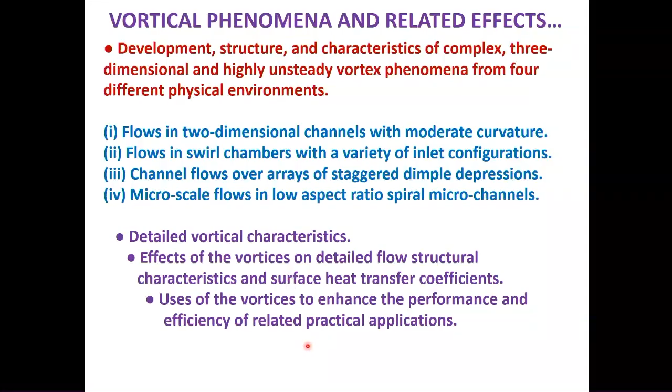We look at detailed vortical and vortex characteristics. We look at the effects of the vortices on detailed flow structure and especially on surface heat transfer characteristics. I do a lot of work related to convective heat transfer and thermal management, so we're very interested in the effects of these vortices on the thermal management. We also use these vortices to enhance performance and efficiency of a variety of devices for a variety of practical applications. First of all, curved channel flows.

We're talking about a very simple 2-dimensional curved channel, and it's astonishing the variety of phenomena that are present in these different channels. From laminar 2-dimensional flows, we then develop Dean vortex flows with arrays of counter-rotating vortex pairs. The Dean vortex flows, of course, develop because of centrifugal instabilities. We then go to wavy Dean vortex flows. These were discovered by a gentleman named Warren Finlay from the University of Alberta in Canada. The modes that we have also investigated include undulating wavy Dean vortex flow and twisting Dean vortex flow.

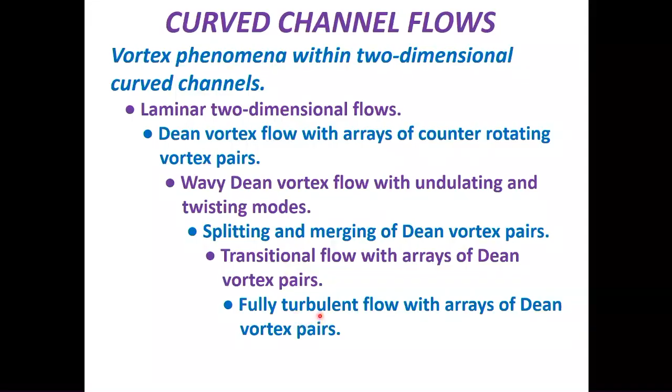We then found very interesting span-wise wave number selection phenomena related to splitting and merging of vortex pairs, and I'll talk about that in some depth. We then go to transitional flows with arrays of Dean vortex pairs, finally fully turbulent flows. So realize in a simple 2-dimensional curved channel, a diversity of different phenomena are present. This is the configuration that we looked at.

Again, a typical experimental facility with highly controlled flow, but the important part here is a straight part of the channel followed by the curved part. So we get very well-developed flow in a straight 2-dimensional channel. We then get effects of the curvature afterwards. The aspect ratio of this channel is 40. The height is 1.27 centimeters. The ratio of shear layer thickness to curvature is 0.011, which can be considered moderate or mild curvature.

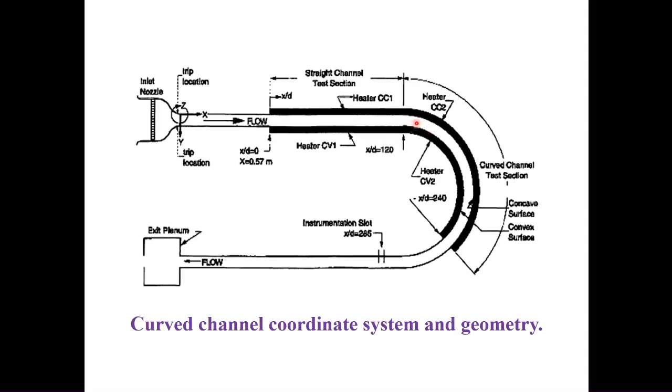We also have heat transfer. We make measurements of heat transfer with these heated surfaces that are shown by the black lines. So again, initial development, straight channel flow, then the curved channel flow. We then exit out here. And this is where we make measurements of surface heat transfer, flow structural characteristics, using hot wire anemometry. We get spectral variations of flow variations as well. This is the kind of phenomena that we look at.

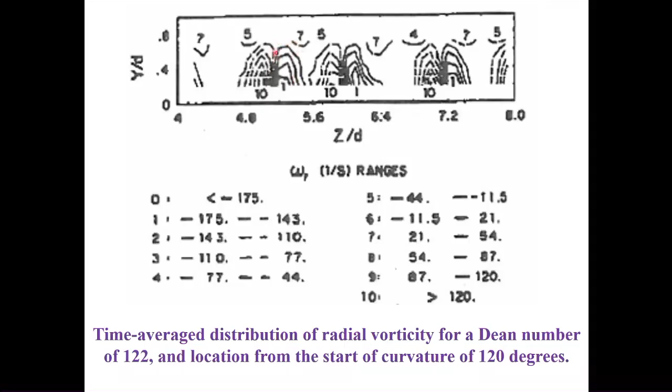And what I want you to see here, this is radial vorticity distributions. Very well-defined vorticity distributions, negative, positive, negative, positive, negative, positive. This corresponds to the time-averaged locations of the unsteady vortex pairs and the time-averaged locations of the smoke patterns. And again, in this arrangement, the upwash region would be between these two opposite sign vorticity regions, the downwash region here. So the vortices, the pair with an upwash between and then downwash around it.

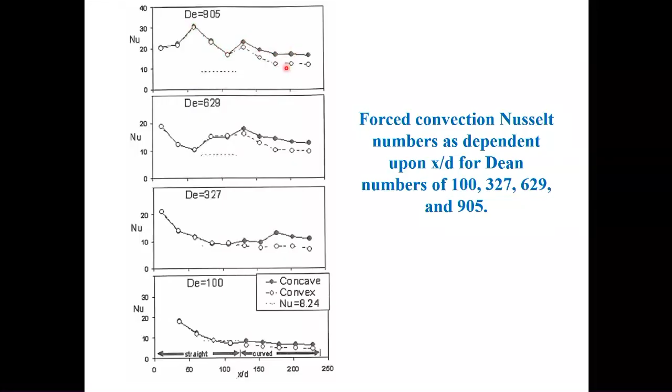We then see this as more pronounced as we go up. This is due to some undulating phenomena. We then go up here and then we deviate. We're now getting into transitional and turbulent phenomena in the straight part of the channel. Very much a transition here, then a decrease and so forth. So many different phenomena are occurring in this one. And again, we always see higher Nusselt numbers on the concave surface than on the convex surface for this curved channel flow. We then also looked at swirl chambers.

Swirl chambers are a cylinder, and we have a diverse variety of unsteady phenomena with an incredible range of length scale. Large length scales, tiny length scales even on the verge of viscous dissipation. These flows are highly turbulent, but also length scales related to the development of arrays of Gortler vortices.

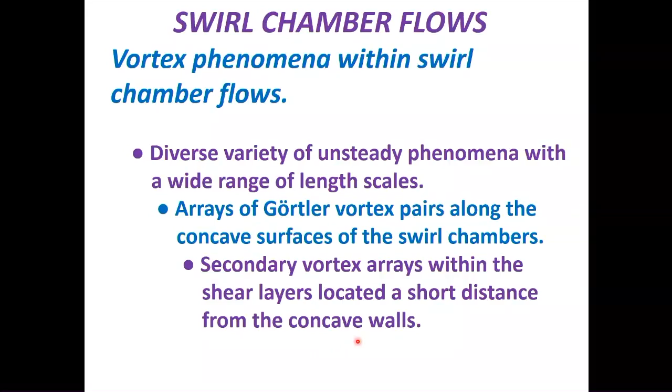So we've looked at Dean vortices, we've looked at Gortler vortices, and again, we see the Gortler vortices developing after the inlet along the concave surface. And of course, Gortler vortices also develop due to the presence of centrifugal instabilities. Secondary vortex arrays also develop in the shear layers, so there are primary Gortler vortices and other secondary vortices. So an incredible variety.

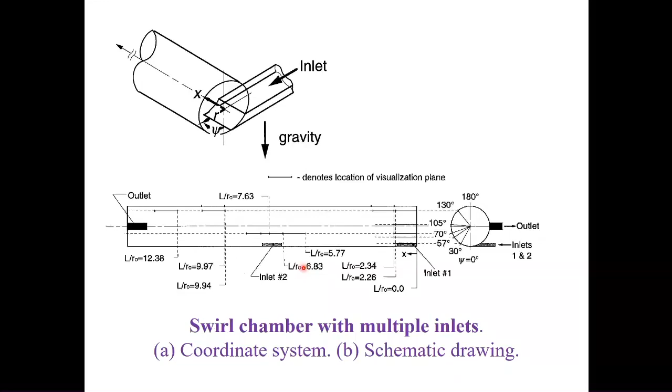This kind of shows you the extent of one of the swirl chambers we've tested. And again, there's the inlet, tangential to the circumference coming in, and then the flow swirls around. We have an outlet way down here. In this case, we have two inlets. The second inlet then revitalizes the flow, reestablishes flow coming in with a new array of Gortler vortices. So again, the inlet comes in, concave surface, then an array of Gortler vortices form. The Gortler vortices can be incredibly unsteady and complex.

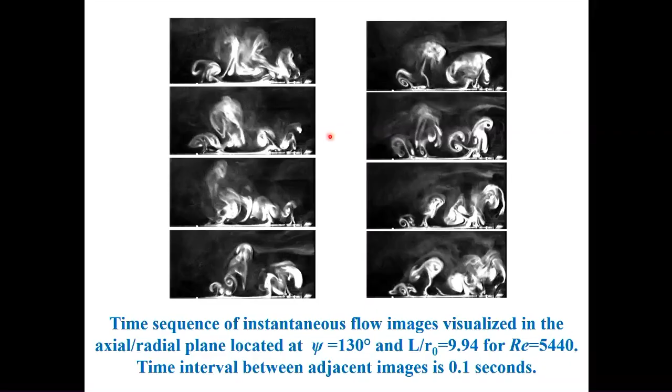This is a time sequence at a certain location for Reynolds number of 5440. Coming over here, you see the vortices will then form. You'll see them highly three-dimensional and distorted and very, very complicated variations in time. And again, the time interval between these different sequences, 0.1 seconds. Sometimes, for certain conditions, the Gortler vortices are well established, and they're in an approximately stationary form relative to the time average. This is a condition we have highly unsteady Gortler vortices. This is just downstream of the inlet.

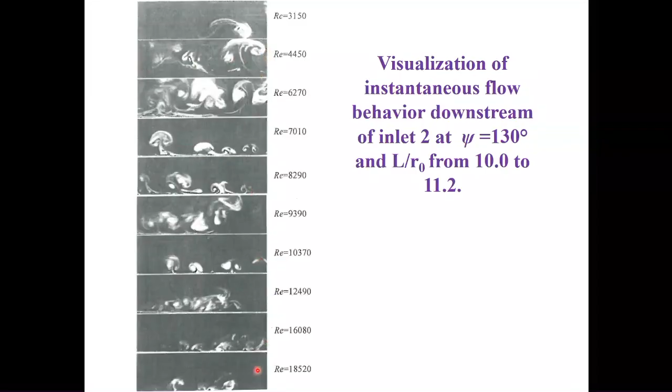We then see variations as we change the Reynolds number. Again, this is a cross-sectional plane just downstream of the second inlet at a certain streamwise location. And again, here we see Gortler vortices across here, but very distorted as we look at different span locations. Smaller ones, larger ones, incredibly large ones for the lower Reynolds number. Notice they become less pronounced and less large. They're smaller as the Reynolds number increases. So incredibly complex behavior in the swirl chamber due to the presence of Gortler vortices.

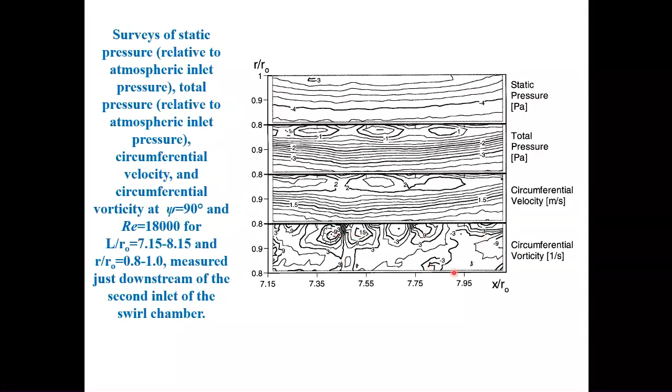We then also do time average work. The part I want to focus your attention is down here. Circumferential vorticity, negative, positive, negative, positive. So even though we have these Gortler vortices that are unsteady, we can see very distinct signatures of the Gortler vortex pairs in the time averaged vorticity distributions.

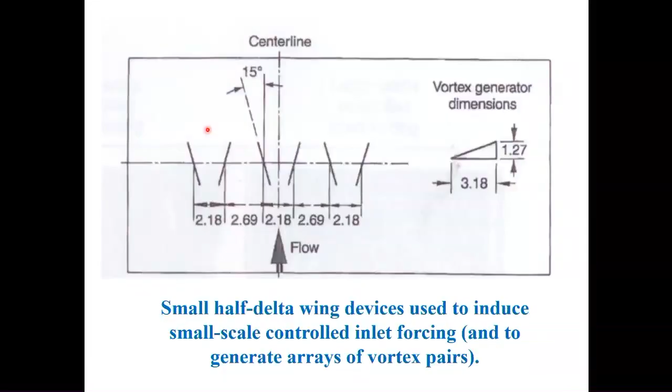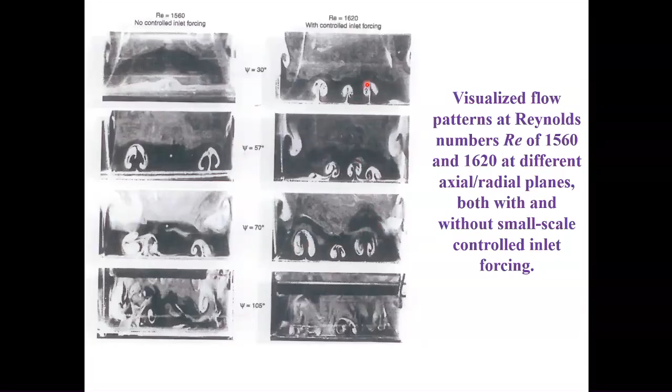We can also control the vortices by using something called controlled inlet forcing, and we can go from the arrangement on the left, where we have a well-defined number of Gortler vortices, but change their number and their character by using controlled inlet forcing. We then change the effect of the vortices on the flow, on the pressure variations, the structure, and the changes on the heat transfer.

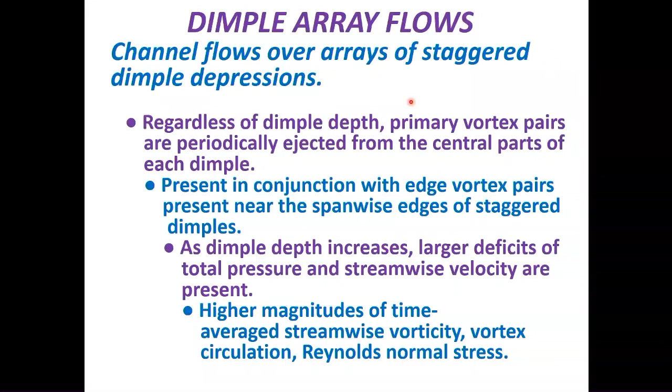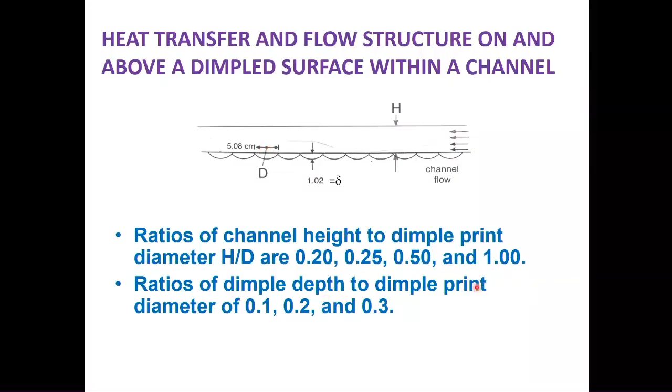So here's our channel height here, the dimples are here, and the diameter, this is called the dimple print diameter, 5.08 centimeters. So these are indentations on the surface. They're going into the surface. Ratios of dimple depth to dimple print diameter, 0.1, 0.2, 0.3. The kind of arrangement is like this. And again, remember, these are in an array on the surface, and they're indentations.

What happens as the flow is progressing along this surface, vortices are ejected from the central part of each dimple. Each dimple has a vortex pair that's ejected. Then, in addition, vortex pairs form along the edge of each dimple on both edges. The vortex pairs that form along the edge of this dimple then advect down here, then they're next to the edge of the next dimple, and they advect sort of along this arrangement between the dimples.

So they're vortex pairs that form near the edges of the dimples. They then interact with other dimples that are downstream. So this creates a very, very interesting vortical environment with many arrays of unsteady dimples that then interact and do things like augment the surface heat transfer. And again, very interesting and complicated arrays.

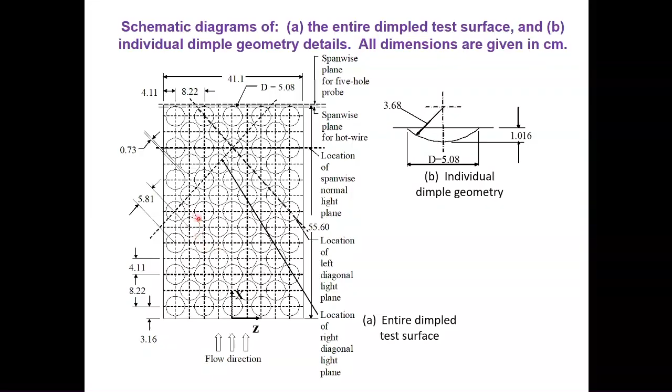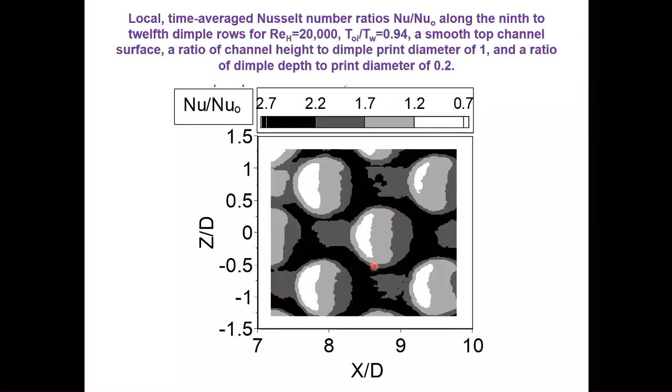So each dimple periodically sheds a pair of vortices. This is done periodically. Then there are also edge vortex pairs that are generated on the edges of the dimples. So we saw this variation of surface heat transfer. We thought, what is causing this? This gives you an idea.

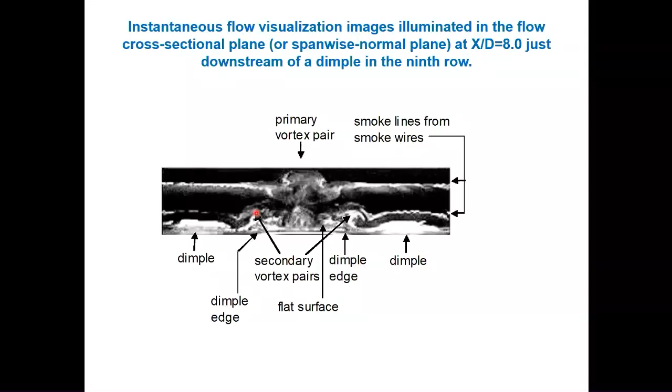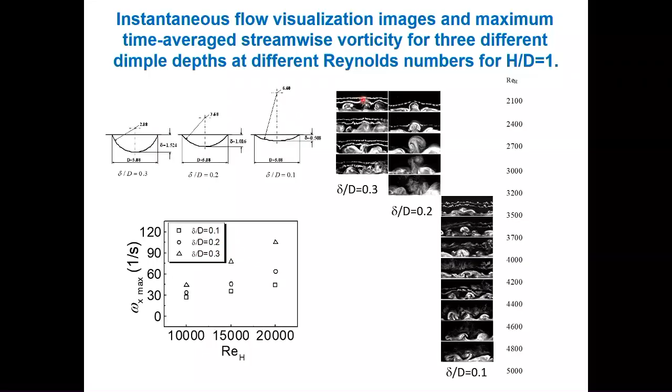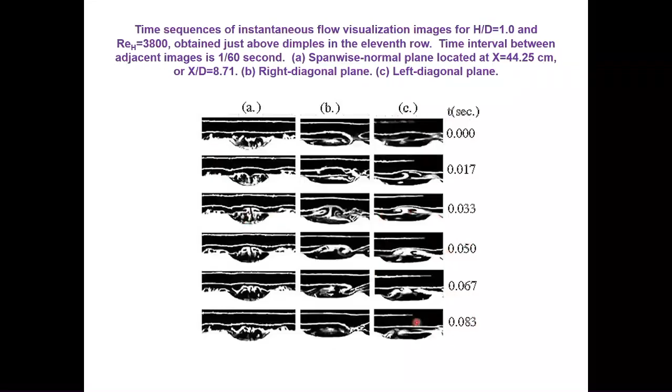We then did visualizations in different planes. These are diagonal planes, streamwise planes. Time is increasing down here, different views. We looked at various things. We analyzed this carefully, and we actually see a number of events that are occurring. This is a time sequence of what happens.

Remember, I said the central vortex pair is periodically shed from each dimple. This kind of illustrates that. This shows an inrush to the dimple with secondary flows within the dimple, further inrush, then the development of a vortex pair. The vortex pair then advects downstream, is then ejected from the dimple. This periodic inrush and ejection of the vortex pair is occurring all the time for all the dimples. So a very highly unsteady phenomena.

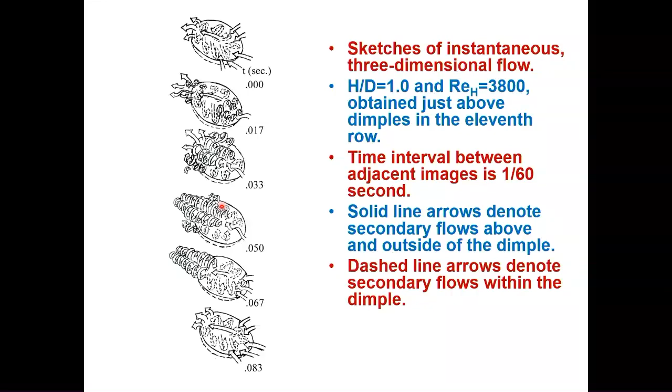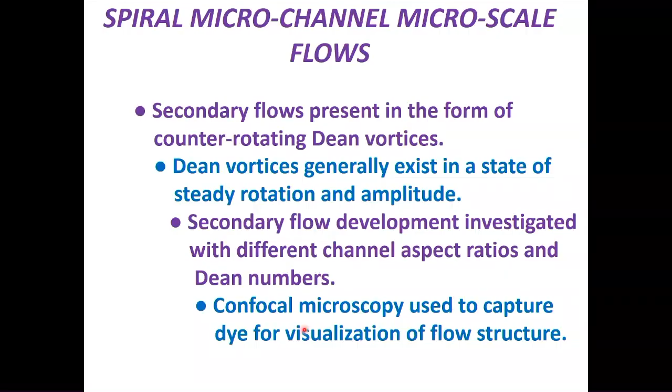Okay, here is the arrangement of this thing. The size of the channel I'm going to talk about, the cross-section is 150 micrometers by 250 micrometers. So we're talking about a very, very tiny little channel. So realize the flows are largely laminar with other things imposed upon it. This is called our G1 spiral microchannel, with the cross-sectional dimensions shown right there, and it has 3 different inlets.

We then put that fluorescein dye in inlet number 1, then it advects around here. We then go through a spiral further, and then we go through an exit. So realize this is like a curved channel. We're dealing with microscale Dean vortex structures. I'm going to show you the behavior of this thing at different cross sections, B, C, D, and E. Realize that B, C, D, and E are in the outer spiral. We then go to F, G, H, and I in the inner spiral. And again, that green kind of shows the track.

So again, realize when we're doing this, we put in the fluorescein dye. We want part of the flow to have fluorescein dye, part of it to be free from fluorescein dye, and it's the contrast that allows us to visualize behavior. We then illustrate what's happening. This comes in near the convex surface. It's then rearranged with different Dean vortex pairs. And then ultimately, the two counter-rotating vortices turn into 4 counter-rotating vortices with 2 different pairs.